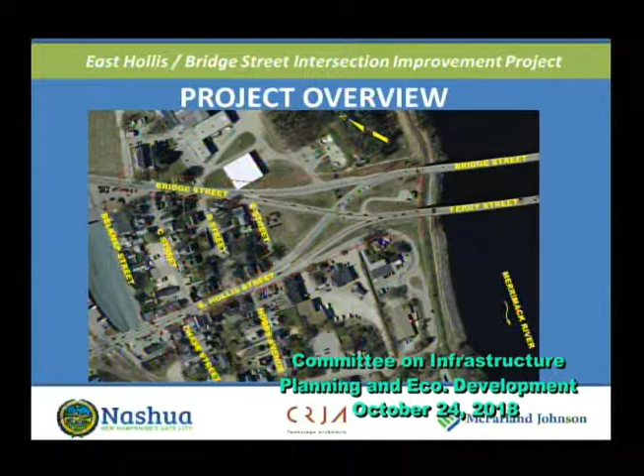This project is being funded through that grant. It's got a $2.8 million construction budget right now. 80% of that money is coming from the Federal Highway Administration, FHWA. The 20% local match is being covered for this project by Turnpike toll credits. So currently there is no city money programmed for this project.

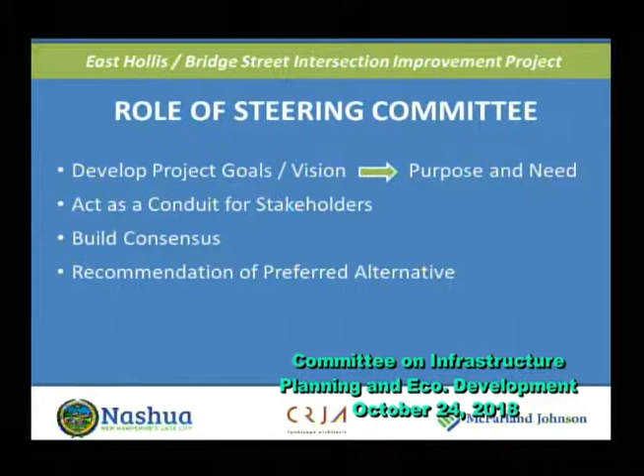Again, just to frame our project, we set out some goals early on. These were somewhat established by the grant application that was submitted.

The project is to address all modes of transportation, so this is not specifically geared just to vehicles using the area, but we were looking at pedestrians, bicyclists, and transit users as well. We know this is a busy intersection. We're trying to do a lot of different things to improve the area, but we did have a goal of

not making the traffic conditions any worse than they are today. We also recognize that this is a regional roadway. A lot of people use this, the bridge, to cross the river here from Hudson and towns to the east to get to the turnpike. Some may say there's too much traffic coming through this area for it to handle. That is not within the scope of this project. We are just looking at the intersection and not trying to solve any of those larger regional transportation issues.

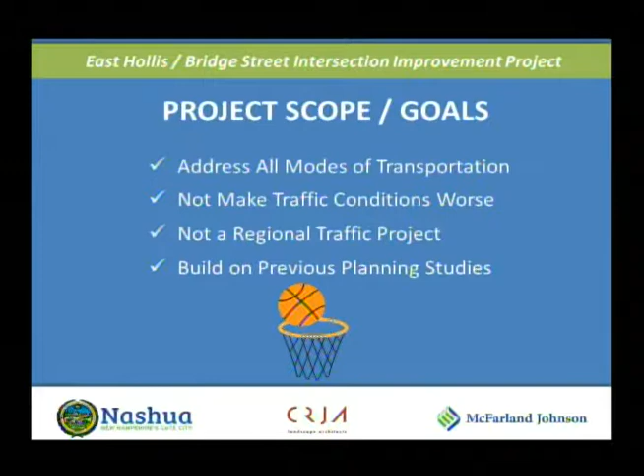And we do recognize that there has been previous work done on this corridor. There's an East Hollis Street master plan document and another study that was done in 2015. We didn't want to redo any of that, so we used that as our starting point, looking at the work that had been done before we were involved, and then building upon that.

Just a little bit about the steps involved when you use this federal money with New Hampshire DOT administering it. It's a 4-step process. We are currently in step 1, which is called the engineering study. The purpose of this is to identify a preferred alternative, which is what we're here for tonight, to get consensus on that.

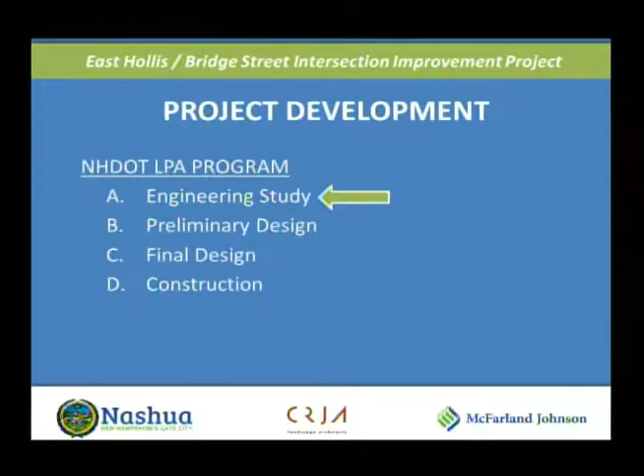The following steps are preliminary and final design. Those will take us to about later in 2019 or very early in 2020 to complete. And then the 4th step is actually construction, which again would be targeting mostly completed in 2020 for this project.

Zooming in on what we do as part of the engineering study, we conduct a field survey. We look at all of the resources in the area. We consult with the state historian, archaeologists, look for natural wetlands. Obviously we have the river right adjacent to us. We also look at whether there's a hazardous site in the area, and try to get a good sense of what our constraints will be, and what things could potentially be impacted by the project.

We go through an alternatives development process involving the public in our decision making as well.

For the public involvement, we did have a fairly robust program for this project. In addition to meeting with the steering committee, I believe we met with them 5 times through the course of this project. We also had a public listening session early on in the process, and what that is, is to make sure that we have a good understanding of all the issues that abutters and people that use this intersection experience every day, that we understand all that before we even start our work. So that listening session occurred very early on in the process.

After we had developed some alternatives, we had a public workshop where we presented all 3 and received pros and cons from the public, and that helped us in selecting the preferred alternative. This meeting here concludes our public outreach effort for this phase. We'll probably have some more meetings through the design phase to flesh out some of the details. But this meeting kind of culminates as the governing body's consensus with the group that we've selected the right preferred alternative.

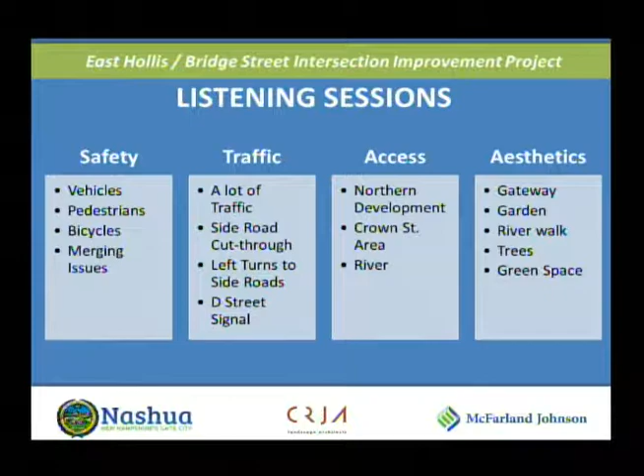We also heard about an interest in gaining more access to the river by pedestrians, being able to get down to the top of the levee and access the path that's down there, having something better defined.

In terms of aesthetics, we did hear about how it's not the most aesthetically pleasing gateway into the city. But we also heard from the local neighborhood some of their concerns about how they've lost some amenities over the past few years as some of those other projects have gone through. A skate park was relocated, and I know some trees were cut for the Riverside Landing. So we did hear from them that they see this project as a way to improve aesthetics of their neighborhood as well, doing that in addition to the intersection improvement. Again, Riverwalk had some interesting ideas about a community garden and dog park and things of that nature as well.

Excuse me, Mr. Coburn, if I may. Mr. Coburn and I discussed at the beginning of the meeting, felt that it would be best — well, he has the slide up and the subject is fresh and hot. If there's any committee members that do have questions, please be recognized and I will allow it at that time so he can explain while he's on that particular subject. Thank you, Mr. Coburn. Yeah, thank you for pointing that out — I'd forgotten to say that.

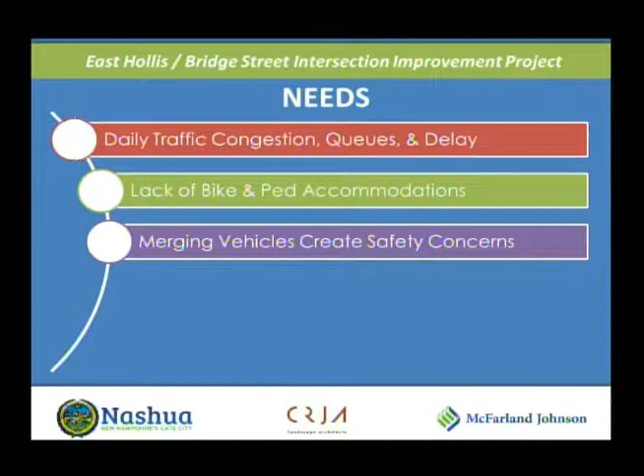So again, purpose: improve mobility, improve access, and that access ties in with facilitating adjacent land use. Again, not adversely impacting traffic, and then providing an aesthetically pleasing gateway. And that one ties into adding some amenities for the neighborhood. The need for the project has been identified as daily traffic congestion, a lack of bicycle and pedestrian accommodations. Merging vehicles create a safety issue in addition to some of the speeds that are occurring out there. There's limited access to the Crown Street and Riverside Landing developments, and again, it's not a very pleasing gateway to the city.

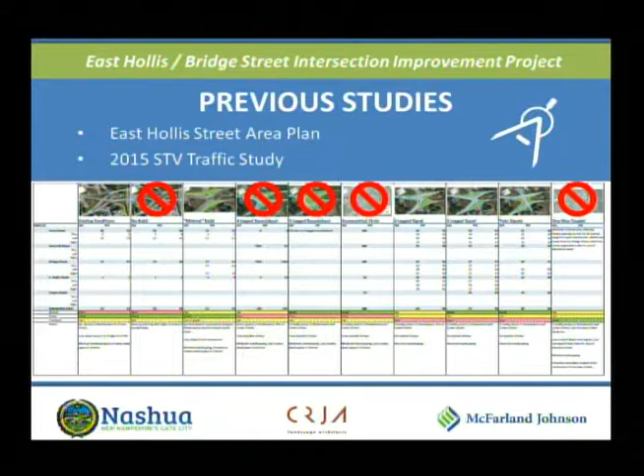So just to touch on some of the previous studies, this is a matrix that the 2015 study done by another consultant prepared, and they looked at a wide range of alternatives, from just more or less keeping what's out there. They looked at different signalized intersection operations. They looked at turning the roads in the area to one way, making Bridge Street one way, and then making East Hollis one way in the opposite direction to make sort of a larger loop. Most of those were dismissed as part of that study.

One of the options, a roundabout, was I guess somewhat accepted and then later was dismissed, and so there's a little bit of confusion about whether it would work. So one of the first things we did was conduct new traffic counts and model how a roundabout would operate at this location, and found that it would not operate very well.

To summarize: traffic's coming from a lot of different directions, and in a roundabout a heavy movement can dominate the situation because there are only yield signs creating gaps. So if you want to control and make sure everybody gets an equal share, you really need a traffic light to dictate that. There are situations where roundabouts work because one movement creates gaps for the next leg, so that leg can get on, which creates gaps for the next leg. But here, with such heavy movements coming in and out of Hudson, certain movements would just dominate the situation.

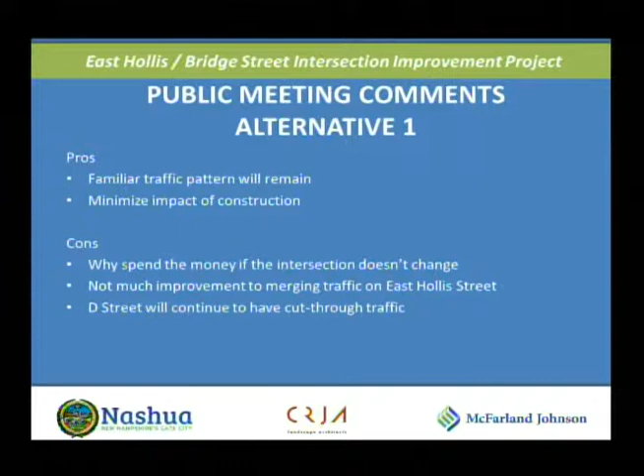Question? Looking at the alternatives and the cost, with no change to the footprint, how does this alternative work out to be $2.3 million? Is that because we're rebuilding all the road that already exists there?

Yes, we did assume that whatever road we touched, we would fully reconstruct, and we'd try to leverage as much federal and state money as we can to make the roads as good as possible. So that's consistent through the three alternatives.

Alderman Dowd: two questions. First, in any of these alternatives, and particularly in alternative one, did we look at widening Hollis and Bridge Streets?

And if we did, I know the biggest part of the congestion problem is traffic going out of Nashua in the evening getting bogged down in Hudson. Is Hudson thinking about doing anything to improve it on their side?

Just last year, Hudson implemented, for lack of a better term, a smarter traffic signal system for their triangle area of signals. They've really optimized that as best they can without doing significant work, so there's nothing in any planning stage right now to improve Hudson beyond what they have today.

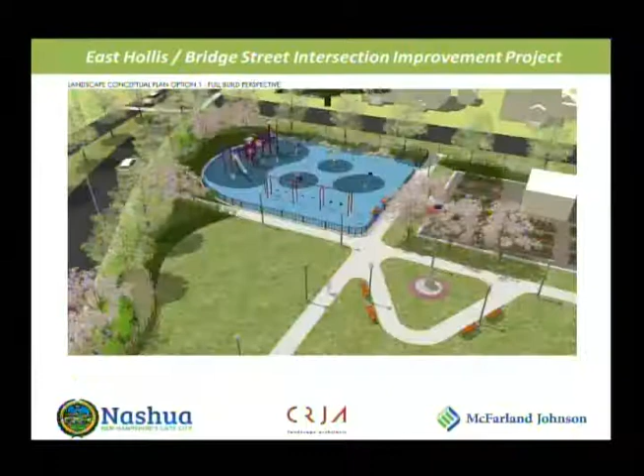So we did start to look at some different alternatives, and alternative 2 came about. This started really with the roundabout idea, but when we realized that wasn't going to work, we kind of kept a circular traffic pattern and just put signals at every corner.

So that's how traffic would operate here. The mouse does seem to be working better. I'm going to try to trace some movements just so it's clear, if you can see the pointer.

If you're on Bridge Street wanting to head to Ferry Street into Hudson, you would come through this traffic signal, take a left at another traffic signal, and then continue on. If you're on Bridge Street coming in, there would be a traffic signal here to let Riverfront Landing come in. You could either continue straight on Bridge Street, take a left, again another traffic light, and then come in down East Hollis Street.

What this does is give pretty much full access to Riverfront Landing. You wouldn't need a signal at D Street anymore, because now you could either take the right and access Bridge Street, or go this way to East Hollis Street, and it even gives you that left-hand movement going through 3 traffic signals to head out on Ferry Street. Also coming from East Hollis Street heading into Riverfront Landing, you would have a light here, but then you'd be able to take this new road and access it that way.

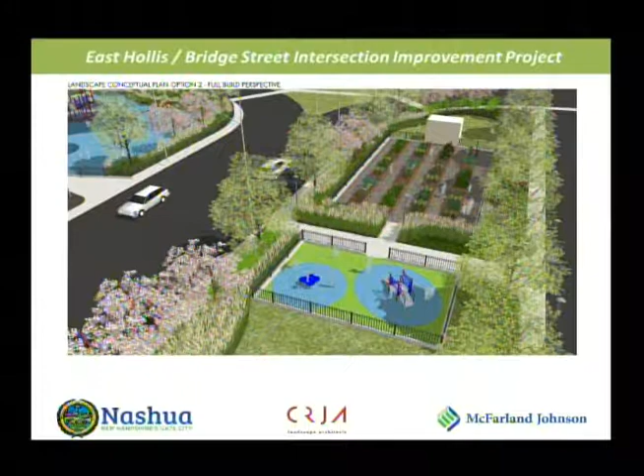If we can go back one slide, my question would be about number 3, listed as a sewer intercept building with the city. I know it's not the optimum topography because it goes down into a hill, but did you give any consideration for the park at that location, maybe to have parking where it's a larger area, with the buildup of trees to isolate from the noise? Did you consider that large area there?

Yeah, but we heard from the local community, and they were more in favor of providing amenities that they could walk to, closer to the neighborhood. So if someone's on C Street, they can still walk to the areas that are closer. If we move it across to the western side, that's a further pedestrian movement for them to make, and we're also asking them to cross two fairly major roadways. So if you're going with young children, that's obviously a concern to parents. That's the reason why we try to keep the things that involve children much closer to the neighborhood.

Alderman Dowd has a question for me. On all of these alternatives, did you do a full traffic study analysis? Yes.

Okay, so it just seems to me that if we put in pedestrian crosswalks with a button to stop traffic, it's going to slow things down. Is that taken into account when you're grading the traffic flow? Yes, the numbers we're presenting here are for a cycle when no pedestrian phase is pushed, so the button isn't pushed. We could generate those numbers, but I should point out, I believe there's a button there today, though I don't think it's used very often.

On the decision matrix here, there's a row for aesthetics and then green space, and we've summarized the size of each piece of green space that's there now. Right now the triangle adjacent to D Street is 0.8 acres. When we square this off, it becomes 1 acre of green space, so it's fairly good size.

What does the slope of that look like compared to what's there now, because now it kind of comes down a little and dips down? So is this all going to be raised, or is it going to be more level with the street? What are we envisioning there?

Jonathan Law again. We haven't gotten into that much detail, but I would probably think we would grade it somewhat flat, with the exception of the sides of those areas that we would berm up, like I spoke about earlier, to help screen traffic. Obviously the playground and community gardens need to be fairly flat, but we could have some topography or grading in the open lawn areas—the majority of it would be flat.

Alderman Kara: Could you just repeat what the city's cost would be to upgrade that, approximately? Particularly the playground area is what we want to make sure of.

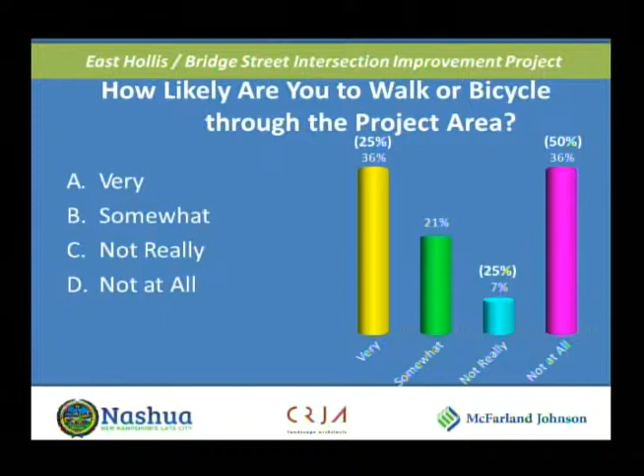Some results about when we asked a question on walking or bicycling through the project area - pretty good mix there. Best location for the green space: heavy preference for putting it next to the river, not much preference for the middle.

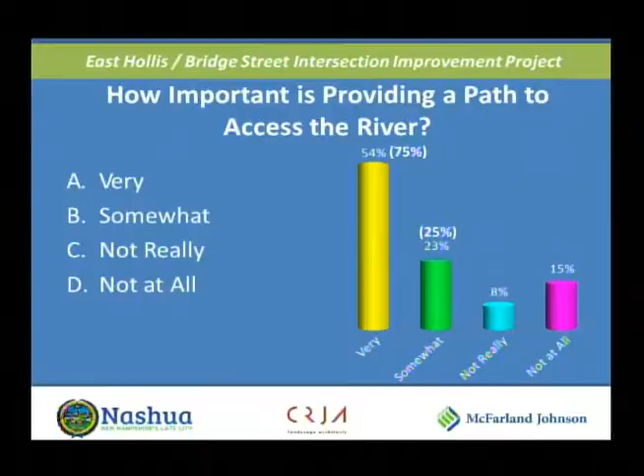The mention of a path down to the river was brought up earlier. There's a lot of support for that - somehow having a defined way to get from the East Hollis Bridge Street area down to the top of the levee. I don't see how that could be feasible because of the topography again.

Isn't that a good 30-foot steep drop? It was built as a levee due to the 1936 flooding. So we've looked at the grading, and we can fit a path that starts more or less across from the driveway to the pump house, at about a 5% grade. So people in wheelchairs would be able to use it and get down to the levee in that distance. Okay, so I was concerned going from the levee down to the riverfront.

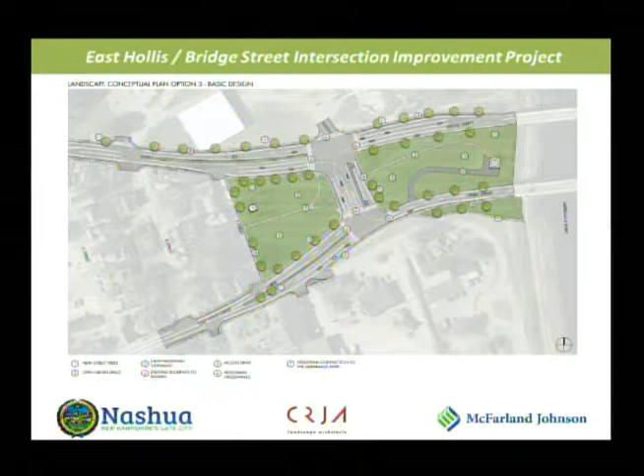Yeah, which can be deceiving, because when you're at the top of the levee looking to the top of the bridge, it's quite a big distance. But the road, Ferry Street, is actually coming back down, so as long as we start our path farther back, it's not actually that much grade difference to the levee.

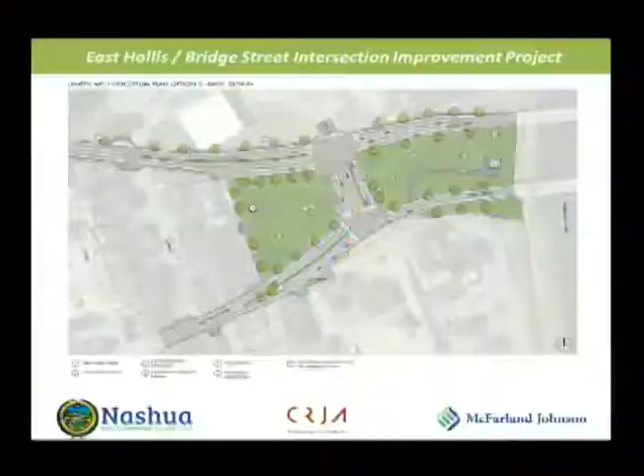Alderman Jettie: So rather than incurring a lot of expense trying to provide access to the river from this location, why can't we take advantage of, to the south, adjacent to the river, there's a roadway with a kind of roundabout-looking thing that's already there, with more access to parking. It would seem easier to provide access to that levee from there than to try to combine it with this project.

Yeah, right there. So one part of the answer to that question is this project wouldn't be able to fund that improvement. Because of our funding source, we're pretty tied into staying within more or less the right of way we have right now. So if we start going and having our path down another street, that would probably become something the city would have to fund itself.

And honestly, when we heard from the neighborhood, I'm sure right now it's probably pretty easy to get over that way, but everybody sees it as a barrier. So I think people kind of see this as the area to get to, and then from there get to the river. I'm not sure, it never came up during the public meetings about going down a side road to get to the river.

It is something we can look at as we move forward. If you look where the Merrimack River is with the arrow, that's the stone for that levee, and that's non-navigable for most people. That levee's quite high, but there is an access point, and the private rowing club does have a river access a little bit farther down from that. I don't think we own any of the property down there, so I don't know that we can use it for access.

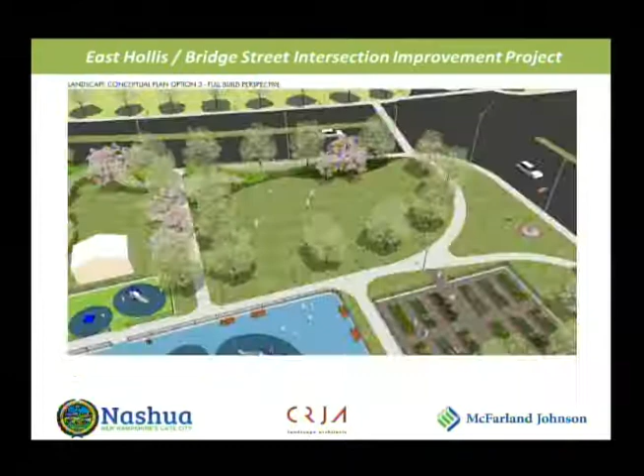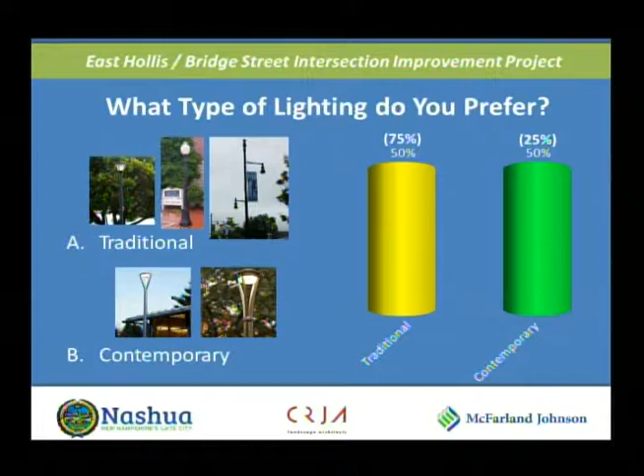Back to our survey results here. It was a pretty exciting survey because everyone had a clicker, like they're on Jeopardy, and it gave instant results, so it was pretty fun. We did ask about what style of lighting. At the meeting, they were split evenly between modern fixtures versus something that looked historic. Online results lean more towards the traditional or historic feel. Again, for benches, pretty even at the meeting, but all of the online people wanted historic.

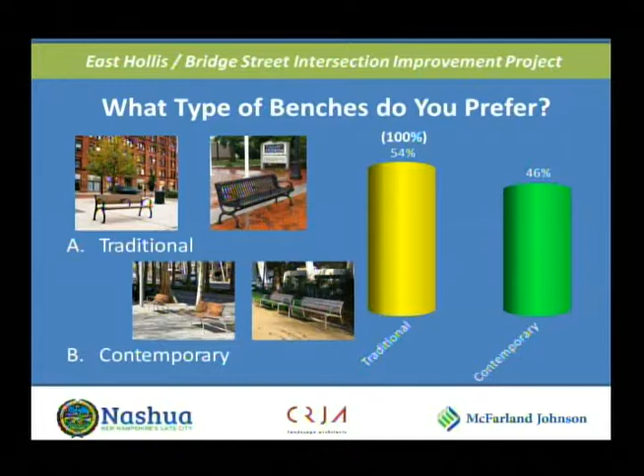Getting to some of the gateway discussion we just had, again we talked about a big structure, just using lighting, having sculptures as the gateway, and then just using trees or other landscaping to announce the arrival to the city. It's a pretty good majority for the trees. I think one of the good things we noted at our meeting was that an over-the-roadway structure can run you $100,000 pretty easily, so saving that amount of money is definitely a plus.

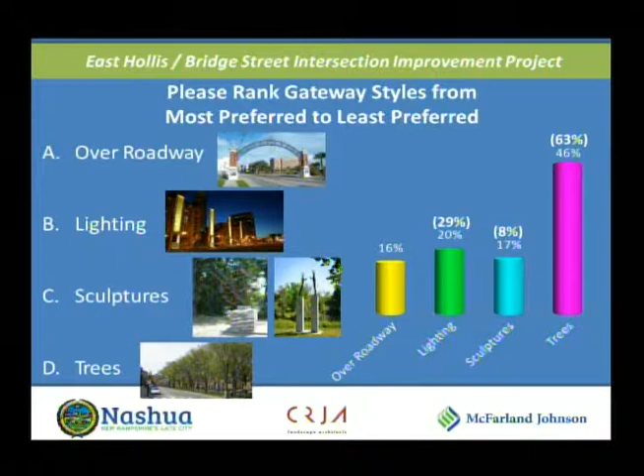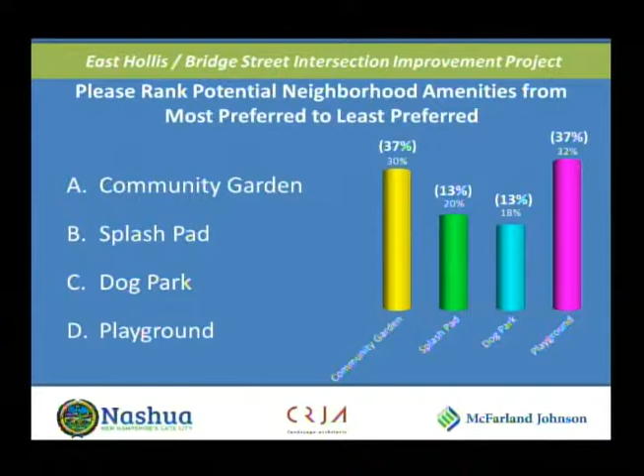This question was asked to inform the city about, as part of this project, whether they want to do anything with amenities in the future, and what the community was thinking. It was pretty evenly split, though playground and community garden saw more support than a dog park or splash pad.

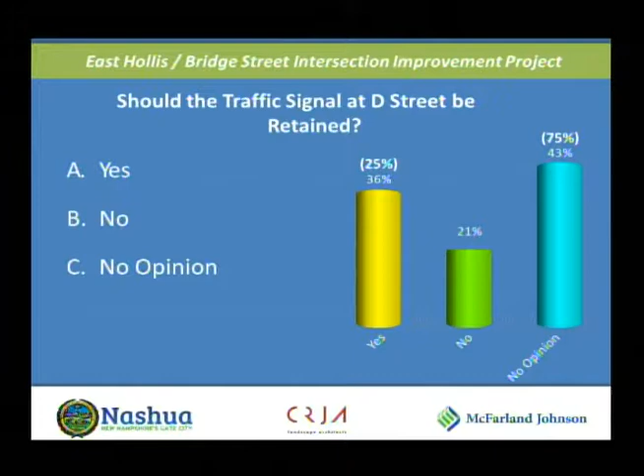We did ask the question about whether the signal at D Street should be retained. The reason we asked is that alternatives 2 and 3 don't actually need it. But we heard from the public that some people on D Street kind of like it, not just to access Riverfront Landing, but to get out onto Bridge Street and make the left, with their own dedicated phase. So we asked the question. A lot of people didn't care or have an opinion, but the majority of the yes/no responses leaned toward keeping it. So it's something to think about as we move into final design, whether or not we get rid of that signal.

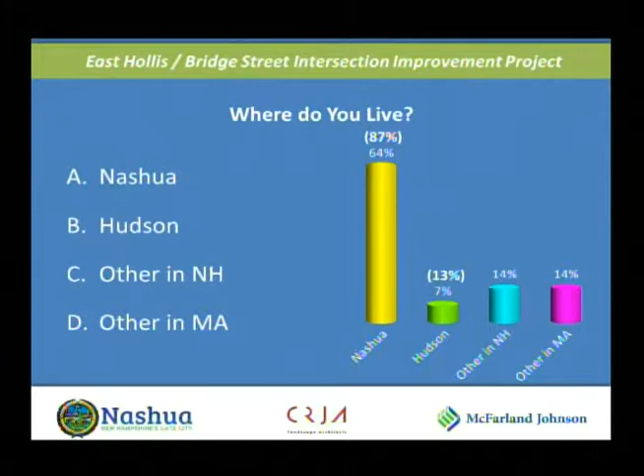As for where people at our meeting and online were coming from, the majority were from Nashua, but we did get some interest from other municipalities. We also looked at what types of users were at the meeting, whether residents, commuters, or just there to recreate.

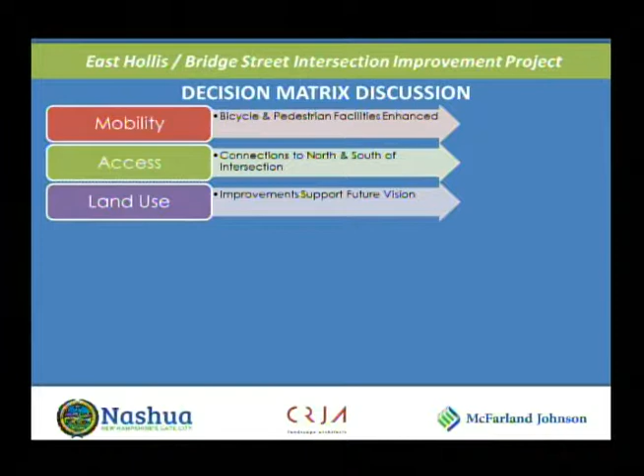So in building what we call our decision matrix, which is a single way to measure and compare each alternative, we compared mobility, access and how that access would affect land use, impacts to traffic, aesthetics, what amenities the neighborhood would benefit from with each alternative, and of course cost.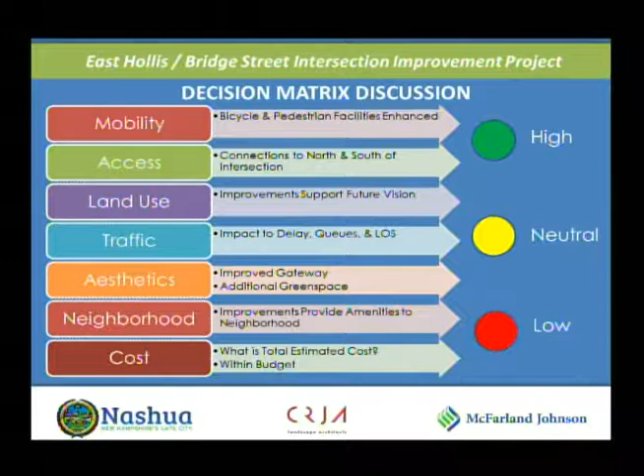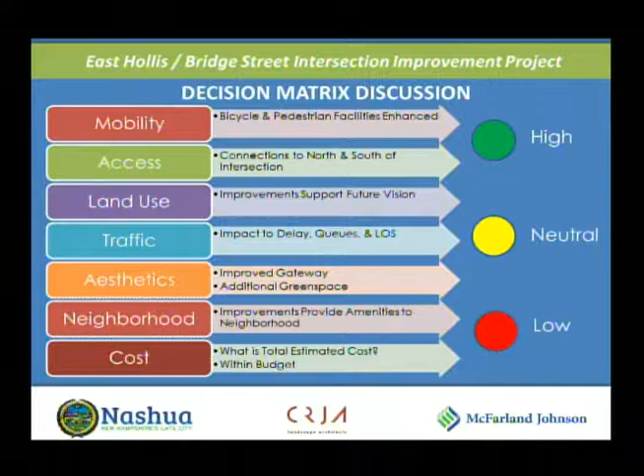We tried to give them a green rating as being favorable and red as not favorable. As you look through the decision matrix, you'll see alternative 2 and 3 really check a lot of the boxes in terms of mobility, access and aesthetics. But you don't see an alternative that solves every traffic issue. To get green through those areas would require maybe constructing another bridge across the river somewhere to get traffic to go elsewhere, or some sort of bridge-over-another-road scenario, something outside the scope of what we could accomplish with the funding we had.

Alderman McCarthy: Just looking at the matrix, the only thing that looks to be an issue is basically the PM peak traffic to Hudson. I guess, presumably you can only study what happens at this intersection with projected volumes based on what's happening today. If that bridge gets to be an F at PM peak, I suspect more people will start using the one to the south and take alternative routes to get home. Plus, there's ultimately the alternative of another bridge getting built somewhere, and I assume if that's north of Nashua it would relieve the problem, since people coming from the south probably already use the South Bridge, so we can assume most of the eastbound PM traffic came from the turnpike north of Nashua. So it seems to me, just looking at it, that alternative 3 makes the most sense. Alternative 2 makes the most sense from the traffic perspective at that intersection, but it doesn't seem to be very popular with the people who live there or use it.

And the conditions are better in alternative 3 than in either do-nothing or alternative 1. So that would seem to be the obvious choice, as I think is the conclusion you've reached. Yes.

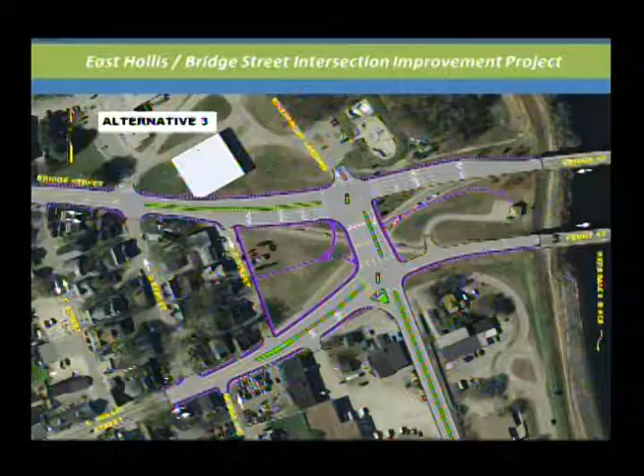Because I know it's not certainly in the budget, but if you take a look at that white square type building, I don't know if it's for sale, but if we owned that. You can see there's a roadway that you're going to be building into it anyway, going in there. If the city owned that, look at that for size, for a park or for gardening, et cetera. But putting that aside, the cost of that light, putting that all in there, and the time for the traffic and gasoline, et cetera.

I mean, nothing is easy here. I'm just trying to look at something to speed the process up. Because if you own that, you could come out and go down D Street, or get into it from D Street, or if you wanted to get to Hudson or almost anywhere.

This almost looks kind of too easy. This looks very complicated. When you get right here, it's right in the midst of everything.

Well, I would say one thing we heard and we were trying to do is make sure we weren't relying on D Street to make any movements. The residents on D Street were pretty clear that they don't like the cut-through traffic they're experiencing now.

Alderman McCarthy: I would point out this is like a 5-year-old aerial, and the skateboard park that's on the aerial isn't there anymore. There's 200 and some odd units of apartments around a road that connects to that intersection. That's correct, this attaches to the plan we've already implemented to the north. You can't go back and make it come out at D Street because they've already built it. That's correct, yeah, this area right here, the buildings are being occupied right now.

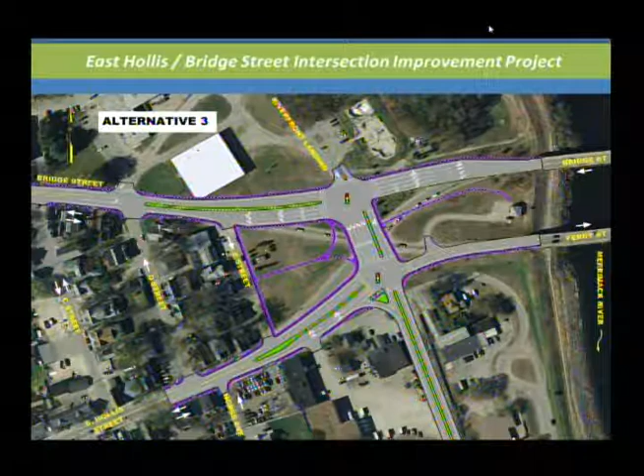Alderman Melizzi-Golja: I would just follow up and support that. At that first meeting, the residents of both D and East Streets were very clear that they wanted to maintain their neighborhood and their sense of community. When I look at these raised medians, I think that nicely does that, so people aren't crossing through and using those streets as cut-through streets.

Okay, seeing any further questions? Mr. Coburn, you got more on the presentation? Just checking, I don't think so.

Just put up the website again if you want to see any of the documents we've produced through the study. What we're really looking for tonight is just consensus that the governing body of the city supports the preferred alternative that's been defined.

If I may chime in, I think that intersection currently needs to be definitely addressed. I compliment you and your crew for looking at the 3 viable solutions. I've heard some comments leading to number 3, and I think I share that thought. I particularly like the potential of the green space area, which is always good for a city of our size. That's definitely needed, and I'm glad that was included as well.